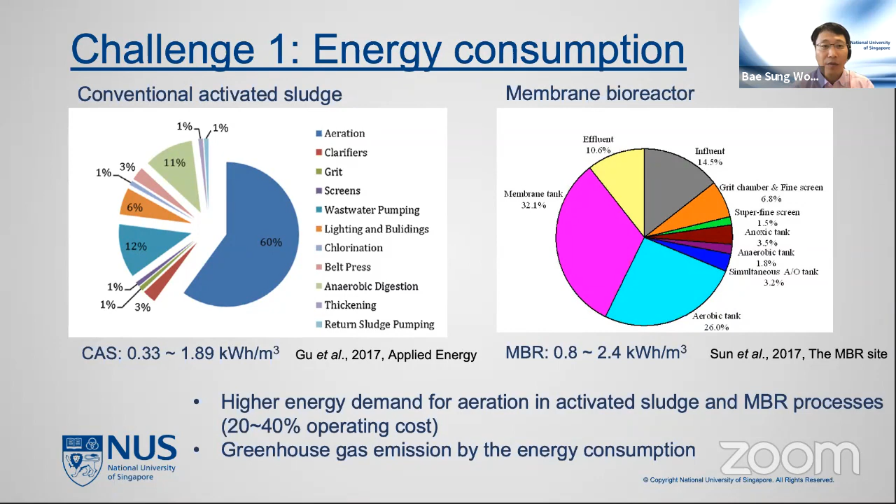Those higher energy demands, particularly aeration in activated sludge and membrane biological processes, cause up to more than 40% of operation cost. Such a high energy demand leads to greenhouse gas emissions due to the operation of this highly intensive process.

Another challenge we are facing in current wastewater treatment plants is emerging contaminants, such as personal care products and antibiotics. Unused or used antibiotics or personal care products pass through the toilet to the wastewater treatment system. Agricultural activities also contribute antibiotics or personal care products. Those untreated or treated, sometimes degraded, products are a huge concern in our society.

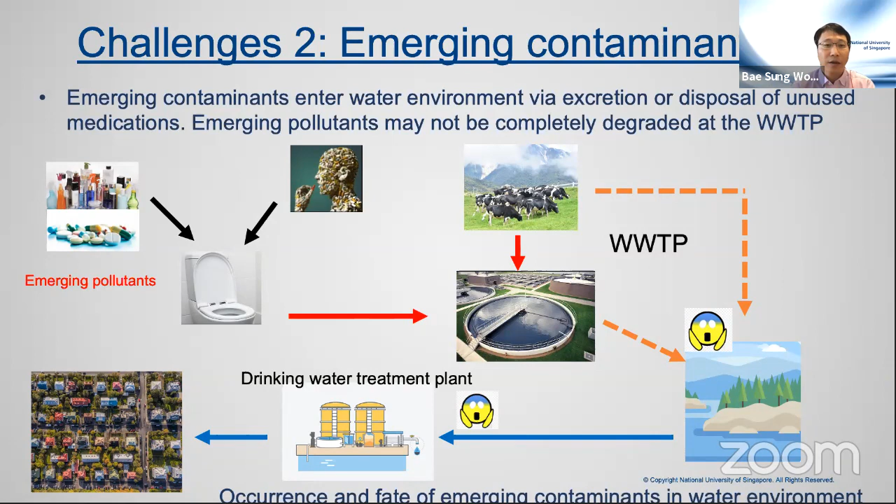For example, antimicrobial resistance genes, or personal care products which cause hormone changes in receiving water. Those receiving waters often feed drinking water treatment plants. Eventually, human beings consume that water. So emerging contaminants enter the environment, either through disposal of unused products or excretion. Some of the emerging pollutants may not completely degrade in a wastewater treatment system. So today I'm going to give two case studies conducted in NUS.

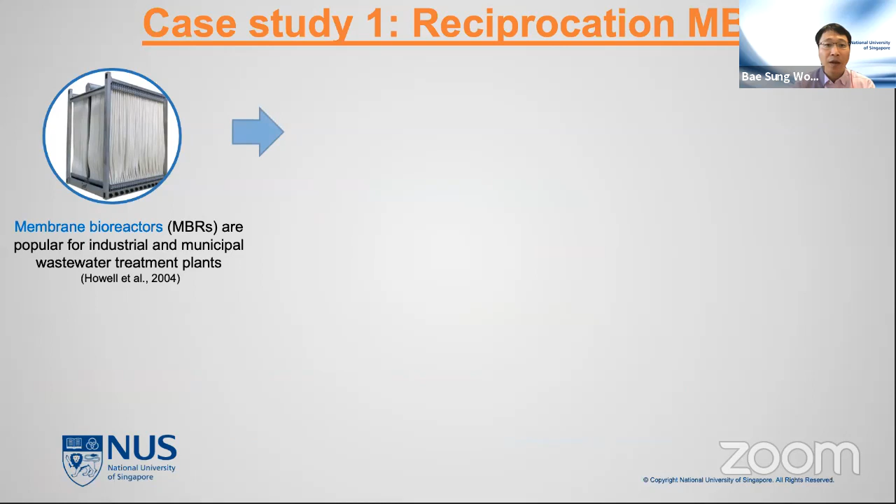The first case study is a reciprocation MBR system. MBR, membrane bioreactor, is one of the popular treatment systems for industrial as well as municipal wastewater, because this system has a small footprint, controls solids, and provides high effluent quality and good retention of pathogenic microorganisms. However, a membrane bioreactor has a bottleneck, which is inevitable biofouling on the surface of the membrane due to inorganic, organic, and in most cases biological pollutants attached to the surface.

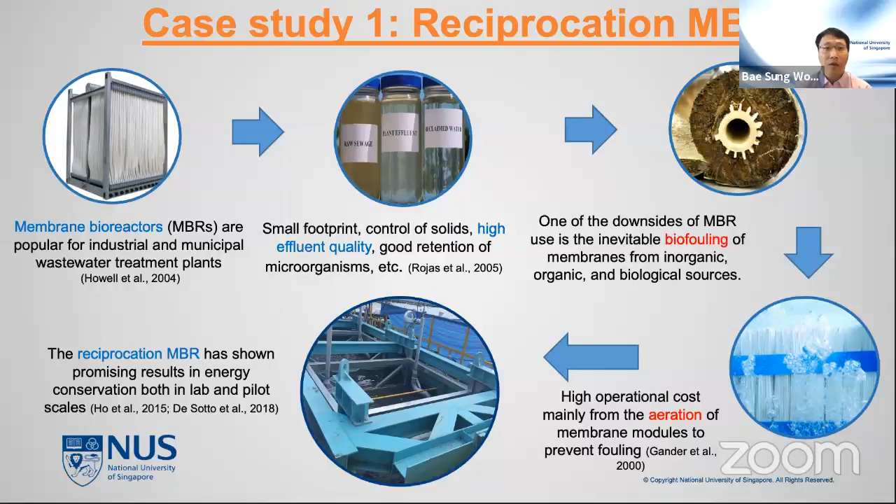From a practical point of view, most membrane bioreactors are operated with air scouring, using aeration to mitigate biofouling in the membrane bioreactor. However, that aeration causes huge operation cost. Recently, our lab has demonstrated a reciprocation membrane bioreactor, which is promising in terms of energy consumption. We demonstrated it both in lab and pilot scale. So what is the reciprocation MBR system? This is a pilot scale membrane bioreactor demonstrated in a domestic wastewater treatment system in Singapore, with a short HRT of 1.5 hours with chemical backwashing.

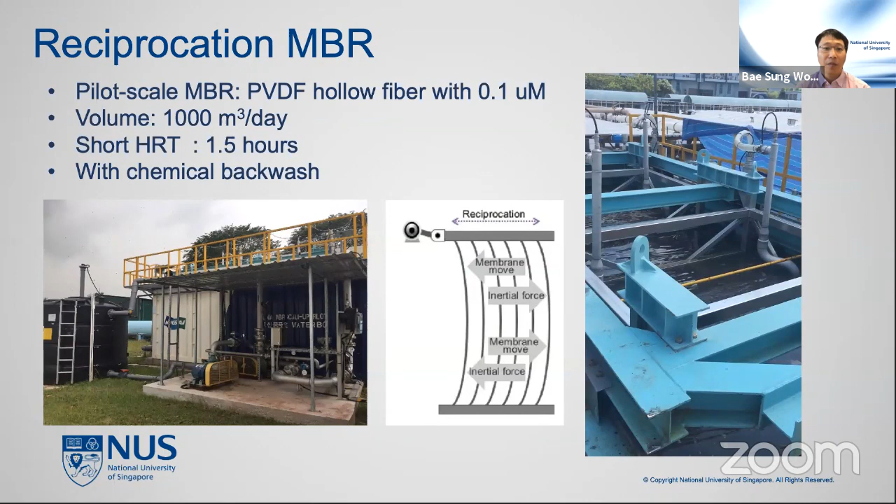So this figure shows the performance of the membrane bioreactor. We operated it for more than 10 months, but I'm going to show you only 6 months, 180 days. So we actually operated it for more than 120 days. We experienced stable performance. Sometimes there was a manageable TMP increase. This is the TMP. And also this system has semi-weekly maintenance cleaning.

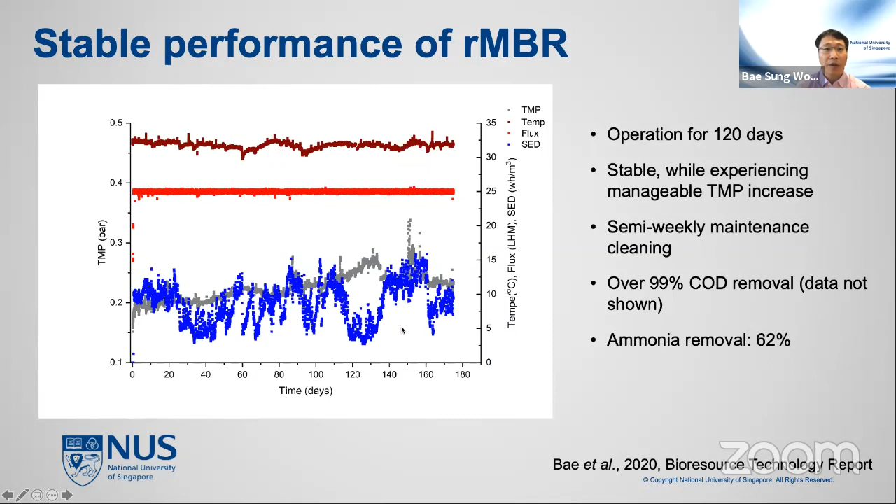So we achieved more than 99% COD removal, and we achieved around 60% ammonia removal. And particularly, I want to highlight the specific energy demand for the membrane bioreactor: the reciprocation MBR requires a very small amount of energy, 0.003 to 0.015 kWh per cubic meter at 25 LMH. So that is 80% reduced energy consumption compared to a conventional air scouring MBR system.

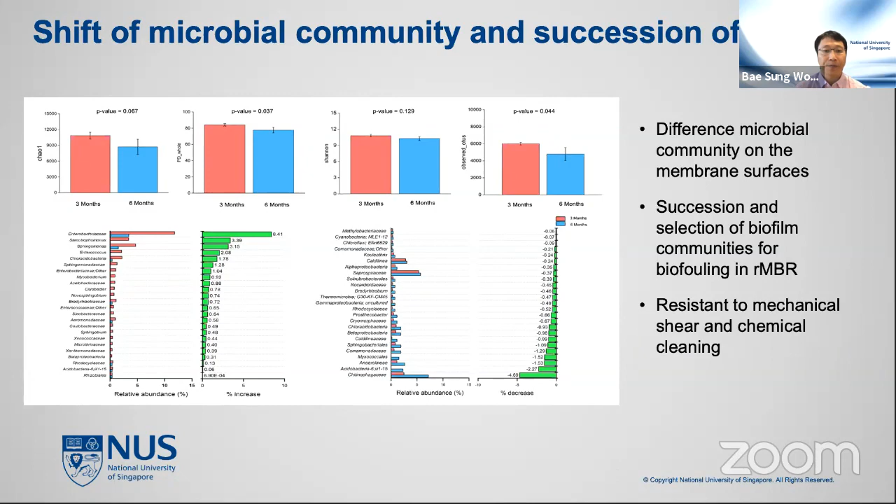So I'm gonna share a toxicology study which we conducted in our lab. So let's start with the background information first. Triclosan was chosen as the research target compound because TCS, triclosan, is an antibacterial agent widely used in home and personal care products. There's extensive use, a huge amount, and also a large amount of TCS was directly discarded into the water system. TCS is non-volatile and moderately soluble, so environmental sources include wastewater effluent, hospitals, and sludge samples. Even at recreation sites TCS was found.

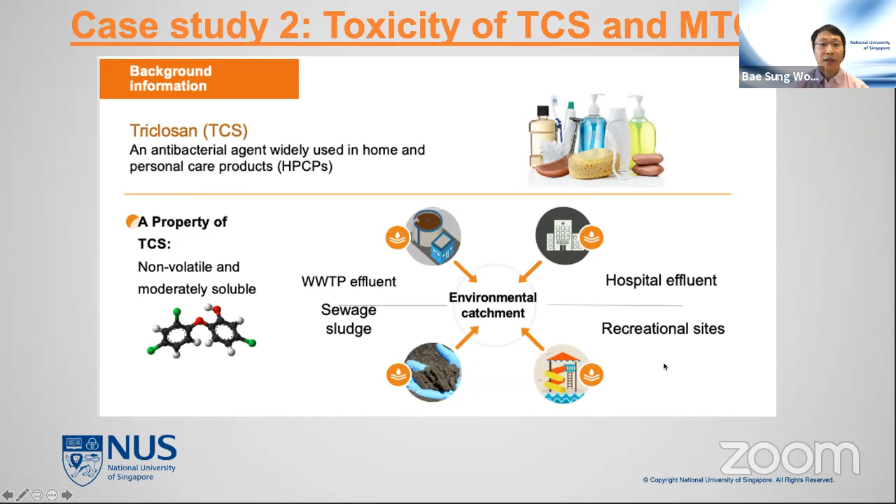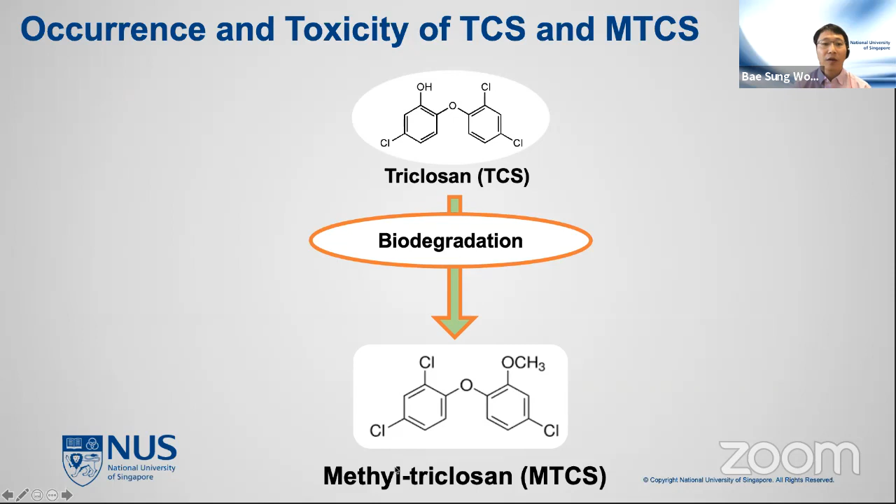In terms of occurrence and toxicity of TCS and methyl triclosan, this is the chemical structure of triclosan. Generally, triclosan is degraded through a biological wastewater treatment system, and the byproduct is methyl triclosan. In terms of toxicity, TCS is known to induce embryonic lesions and delay of development, cardiac toxicity, and endocrine disruption. And also MTCS, methyl triclosan, interacts with proteins and disrupts thyroid hormone actions. Phenotype effects have also been reported in zebrafish embryos.

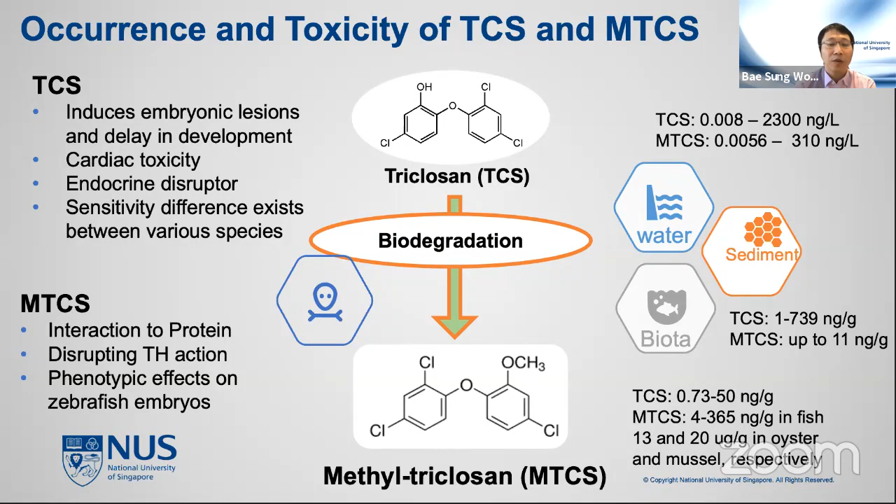The occurrence of TCS in the water matrix is up to 2000 nanograms per liter, and MTCS is up to 300 nanograms per liter. Sediments and even biota have higher concentrations of triclosan and methyl triclosan. So we are using TCS and MTCS as model chemicals to understand how these emerging contaminants affect aquatic environments.

So in terms of methodology, we use omics approaches. We use transcriptomic analysis of the gene expression of zebrafish embryos, and we also use metabolomics, so metabolites such as sugars, nucleotides, amino acids, and lipids. So using transcriptomic and metabolomic analysis, we understand how the chemical affects the development of the zebrafish embryo.

The advantage of the multi-omics approach is that it allows us to better understand changes in genomic and metabolic pathways, and we can predict the biological response to external stressors, here TCS and MTCS, and that increases the robustness of the toxicity study. And also the zebrafish is a good model organism to predict human health effects as well.

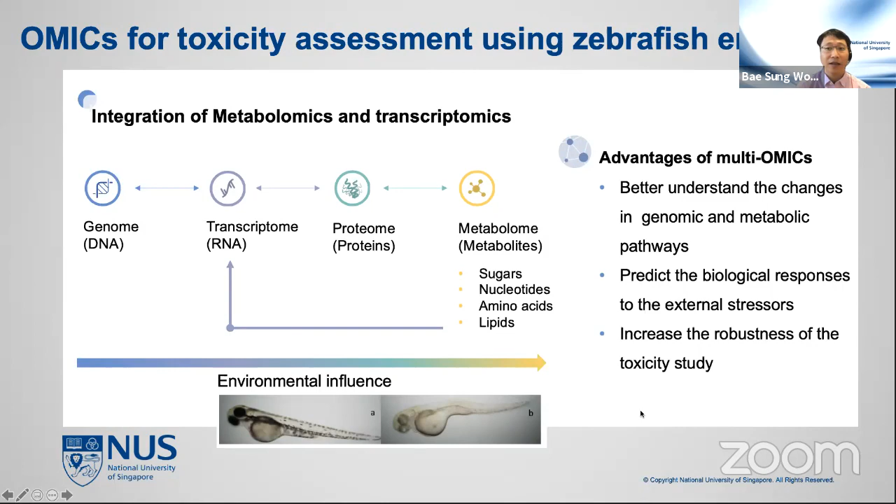So let's move to the results section first. So MTCS, methyl triclosan, affects biological pathways of amino acid synthesis and starch and sucrose metabolism. This PCA plot shows different concentrations compared to control here. And the higher concentration, 400 micrograms of MTCS, here is distinct from the other groups. We also observed morphological changes in the pigmentation rate of zebrafish embryos at 400 micrograms per liter of MTCS. And we also have a similar separation with MTCS exposure.

Then the heat map shows 21 different metabolite changes, from control to lower to higher MTCS exposure. Particularly, the higher concentration shows 21 dysregulated metabolites.

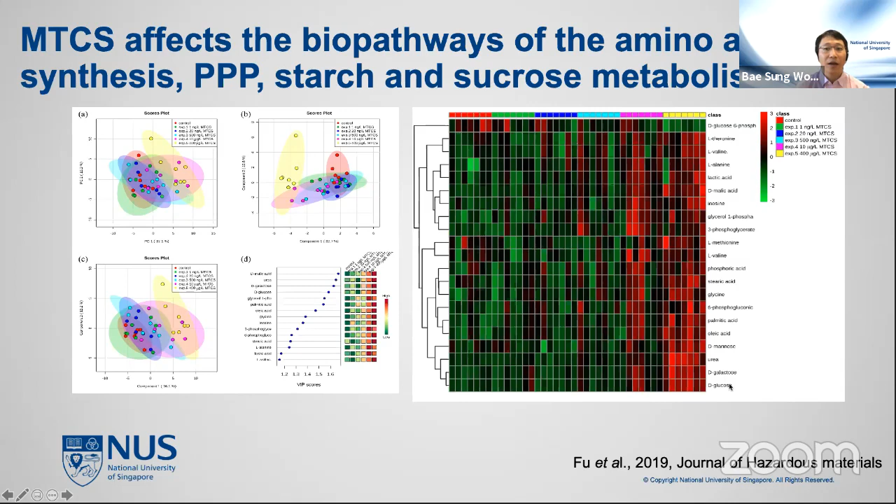So we also wanted to understand the toxic effect of a TCS/MTCS mixture on zebrafish embryos, because through biological wastewater treatment systems the environmental ratio of triclosan versus methyl-triclosan is a 10:1 ratio. So for example, we often found 10 micrograms of TCS, which indicates 1 microgram of MTCS. So we want to know the real environmental effect of the wastewater discharge into the aquatic environment.

So we chose different mixtures 1, 2 and 3, meeting the environmental ratio of 10 TCS versus 1 MTCS. The PCA plot on your left shows a differentiated mixture 3, which is the higher concentration of TCS and MTCS. As well as this, the heat map shows 4 metabolites, particularly mannose, galactose, glucose, and lysine, are disrupted with exposure to the mixture of TCS and MTCS.

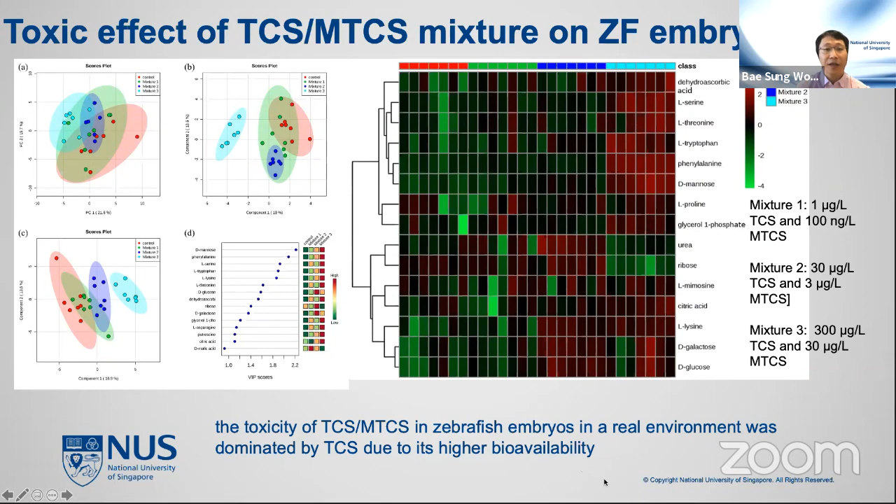So the toxicity of TCS/MTCS to zebrafish embryos in a real environment was dominated by TCS, mainly because of the higher bioavailability of the TCS chemical. And we want to understand the differences between TCS, MTCS, and the mixture of TCS/MTCS in zebrafish embryos. So using multivariate analysis, heat map analysis, as well as pathway analysis, we found energy metabolism, amino acid metabolism, and cell function were significantly influenced by TCS and MTCS. And also biological pathways, particularly the TCA cycle and nitrogen metabolism, are affected. So those listed dysregulated metabolites show how TCS and MTCS, if not treated properly, are going to affect aquaculture animals.

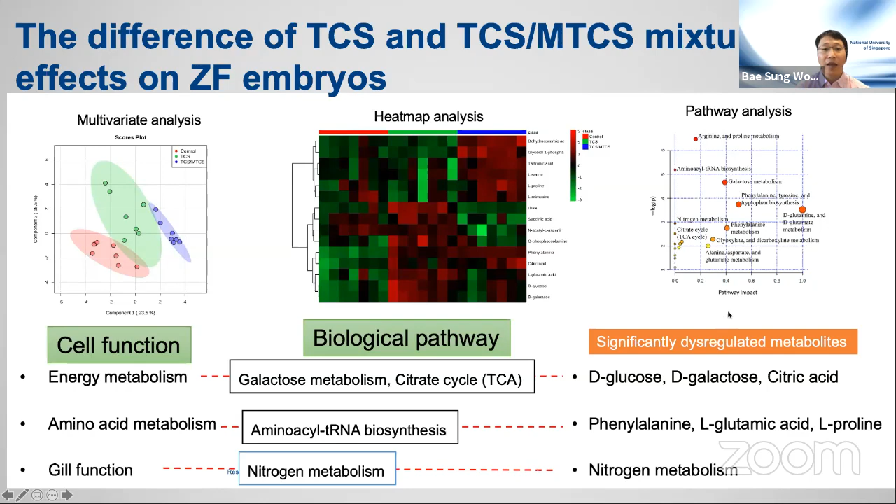Not only metabolites, a gene expression study shows the potential toxicity of TCS. We used transcriptomic analysis and KEGG analysis of gene expression. Particularly, I want to highlight the action of TCS on oxidative phosphorylation. So this is the inner mitochondrial membrane, where TCS acts as a proton ionophore. For example, this is TCS, which interacts with hydrogen, which prevents ATP synthesis. Another effect is on cardiac muscle contraction, a similar effect, where TCS prevents the calcium pathway in cell metabolism. So this, based on transcriptomic analysis, shows how TCS interferes at the molecular level.

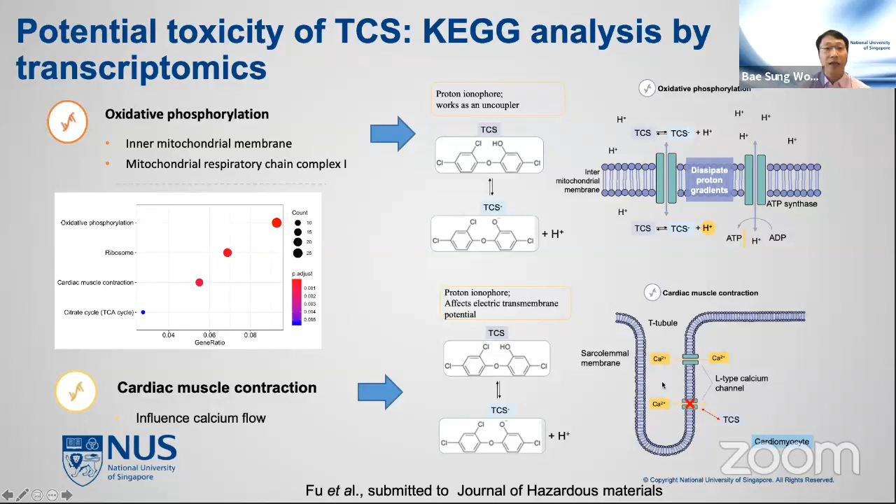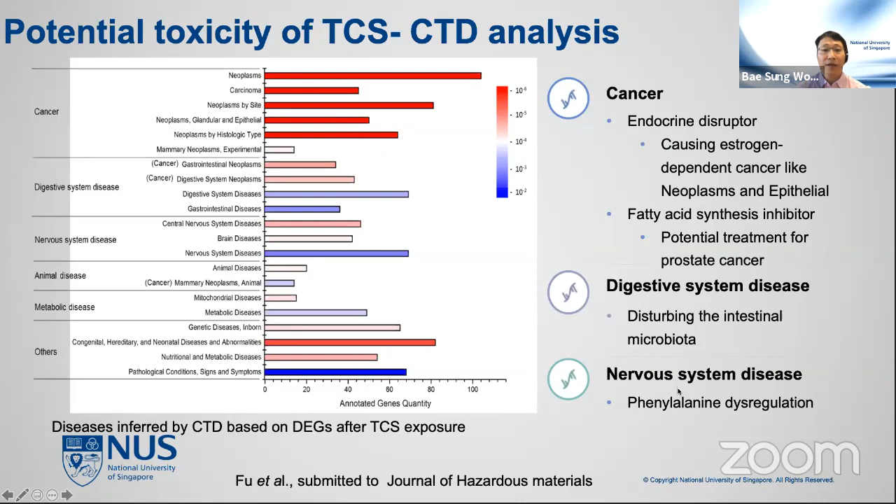And furthermore, we're using the Comparative Toxicogenomics Database to see how an environmental chemical, for example TCS, affects human health. Using differential gene expression shows the potential health effects if TCS is exposed to humans, and what diseases may be caused by TCS exposure. One example is cancer, as an endocrine disruptor or fatty acid synthesis inhibitor; those modes of action cause cancer. And also TCS might cause digestive system diseases, because TCS will disrupt intestinal microbiomes in humans. And also there is dysregulated phenylalanine, which affects the nervous system in human beings.

So let's move on to the conclusions of the 2 case studies. The first case study used the reciprocation MBR system to reduce energy cost in a real wastewater treatment system. The reciprocation MBR generates a mechanical force to control biofouling. The specific energy demand of this reciprocation MBR ranged from 0.003 to 0.0515 kilowatt-hours per cubic meter, which reduced energy consumption by up to 85% compared to air scouring MBR. We noted MLSS concentration is one of the key parameters controlling energy consumption, because MLSS concentration correlates with specific energy demand.

In the second case study, metabolite levels were altered with MTCS exposure, even when phenotypic changes were not observed. Toxicology studies employed higher concentrations of TCS and MTCS. Basically, at lower, environmentally relevant concentrations, we could not find any phenotype change. However, metabolites revealed certain changes due to TCS and MTCS. And particularly, TCS dominated the effects at the environmental ratio of the TCS/MTCS mixtures. And using integrated approaches of metabolomics and transcriptomics revealed the toxic effects and eventually potential diseases associated with TCS and MTCS.

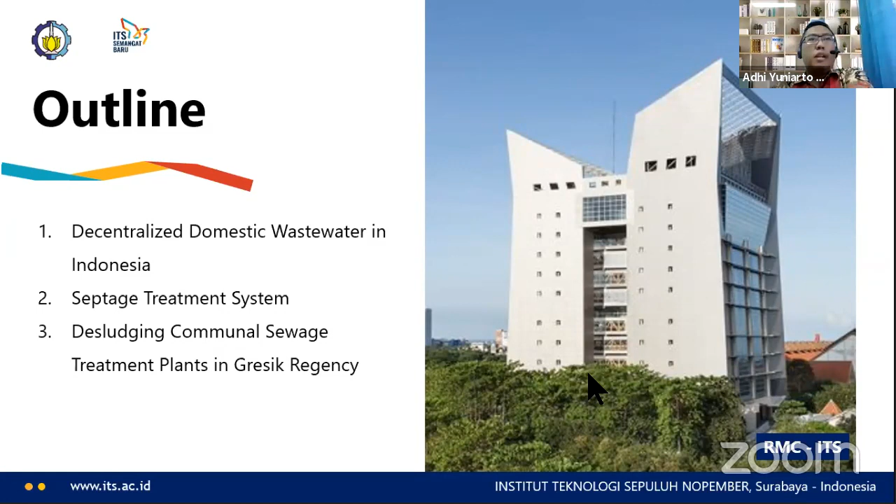I want to give some overview about Indonesia so you can feel how difficult the challenge is for sanitation and wastewater systems in Indonesia. The population of Indonesia is about 273 million right now, and 56% live in urban areas, expecting 67% to live in urban areas in 2030. We have 8 major islands, but 58% of the population live in Java. It's quite small.

Here, we have decentralized government with 34 provinces, 415 regencies, and 93 cities. These local governments can set up local regulations, but for sanitation and domestic wastewater infrastructure funding, they still depend on national programs and national agencies.

Let's see the existing sanitation situation in Indonesia right now. Wastewater, especially grey water from homes or public facilities, is still disposed directly into water bodies, especially the drainage system. The latest report says that more than 75% of houses already have individual toilets, but most of them are low quality latrines. Open defecation still happens. In some parts of Indonesia, showering and washing in streams still exist.

In rural and urban areas, illegal disposal and dumping of sludge or septage from desludging of septic tanks happens into rivers or empty spaces, especially in rural areas. The impact of poor sanitation: we already know that 70% or more of rivers and groundwater are polluted. The sad one, 50 per 1,000 babies mortality due to diarrhea, which is 4% of diarrhea happening to the population.

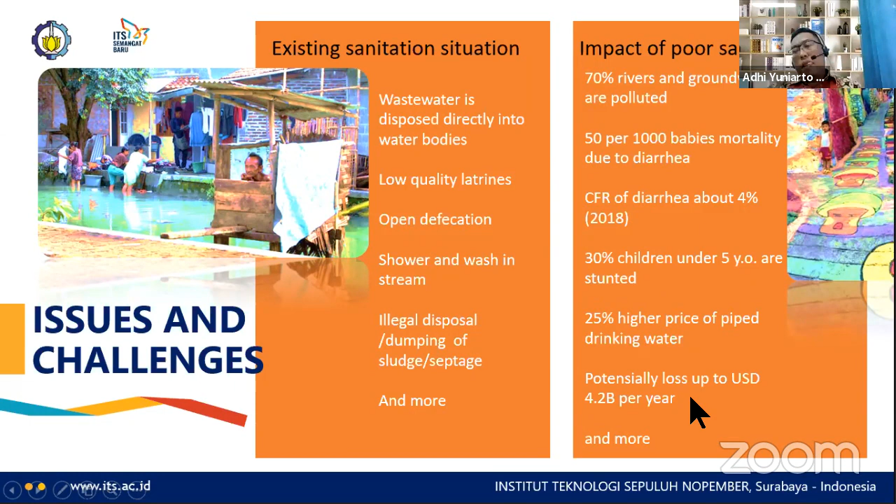30% of children under 5 years old are stunted, and we have to pay a 25% higher price for piped drinking water. The losses from this poor sanitation situation are potentially about $4.2 billion per year. To overcome this situation, in 2007 the national government already set up programs for sanitation, and we try to have 100% sanitation access in 2030.

The programs are mainly done by ministries. The first program is community-based total sanitation, which belongs to the Ministry of Health. The second one, infrastructure development, belongs to the Ministry of Public Works and Housing. And the acceleration of sanitation development program is from the Ministry of National Planning. We also have a program from the Ministry of Village and Transmigration, we call it Village Funds, and special funds and grants for sanitation from the Ministry of Finance.

This also includes sanitation funds from donor parties, for example USAID, JICA, Danida, and other foreign parties. And the last one is school sanitation from the Ministry of Education, because we also have to improve our school conditions.

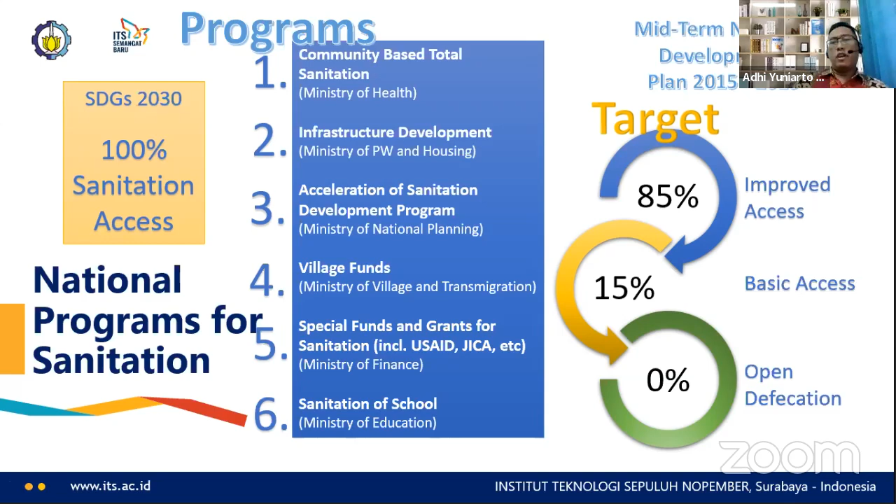And from the data, we know that the urban access is not much improved. But in rural areas, we have a good improvement during these 2 years. And we also have the national program for community-based total sanitation, which we call STBM, starting in 2008, and it consists of 5 programs: ODF, open defecation free; washing hands with soap; safeguarding drinking water and household food; domestic waste management, including solid waste; and domestic wastewater management.

And the program, especially for ODF, for sanitation, the last reports show good progress. We still have about 7.6% of people who still practice open defecation.

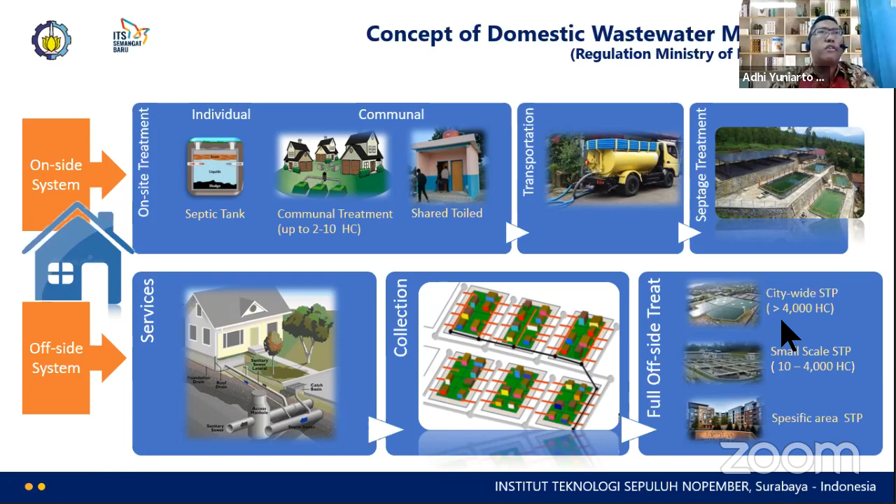The full-scale or city-wide STP, more than 4,000 house connections, or 20,000 PE. A small-scale STP, around 10 to 4,000 house connections, and a specific area STP. Right now in 2019, we have on-site treatment, about 260 septage treatment plants, because the end of the treatment is the septage treatment plant. I don't know exactly; some data say 262, 264, but around 260 are already built and rehabbed or optimized until now.

For offsite treatment at regional or city scale, we have some cities already connected. Not the whole area of the city, maybe most parts of the city: Medan, Parapat, Batam, Tangerang, Jakarta, Denpasar. And we will have 5 more big sewerage systems and STPs in Jakarta, Palembang, Pekanbaru, Jambi, and Makassar. Jakarta will be about 2 million PE.

So offsite treatment using decentralization and the communal system: we have more than 50,000 community-based communal systems, and institutional-based around 240, built in 128 cities or districts. But the capacity is not so big, around 1.7 million PE. So based on data in 2017, only less than 2% of the population have an offsite system.

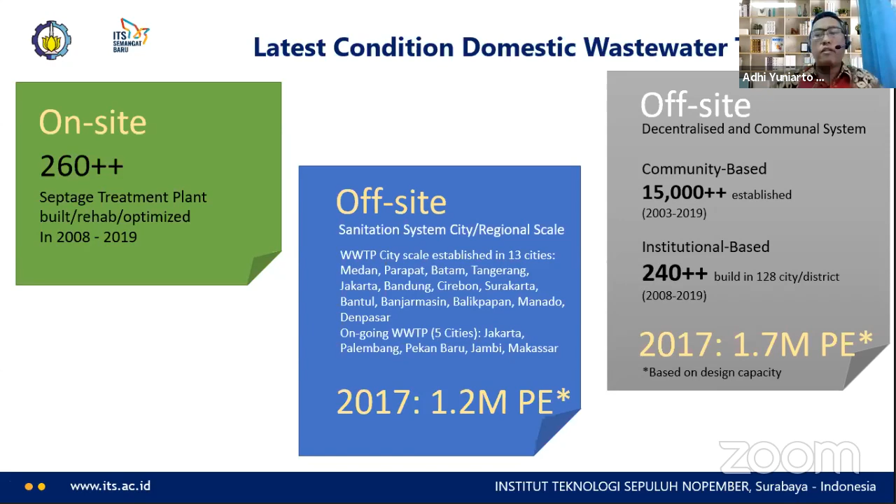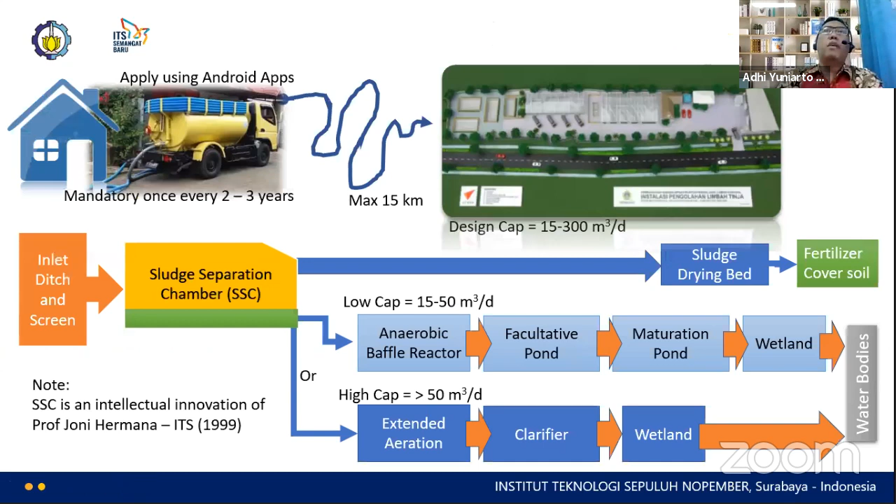Let's move to the next part, the septage treatment system. According to the regulation, it is mandatory for individual septic tanks or institutional or communal systems to be desludged. Some local governments, through the public works agency, have already developed the system. So the customer has to apply using an Android application to set up the time and put in a schedule.

This is the system recommended by the regulation. The desludging system starts from the inlet ditch and goes to the sludge separation chamber. This is one of the intellectual innovations of Prof. Joni Hermana, and it works like a filter, so the solids stay on the surface and dry naturally, then transfer to the sludge drying bed and become fertilizer and cover soil.

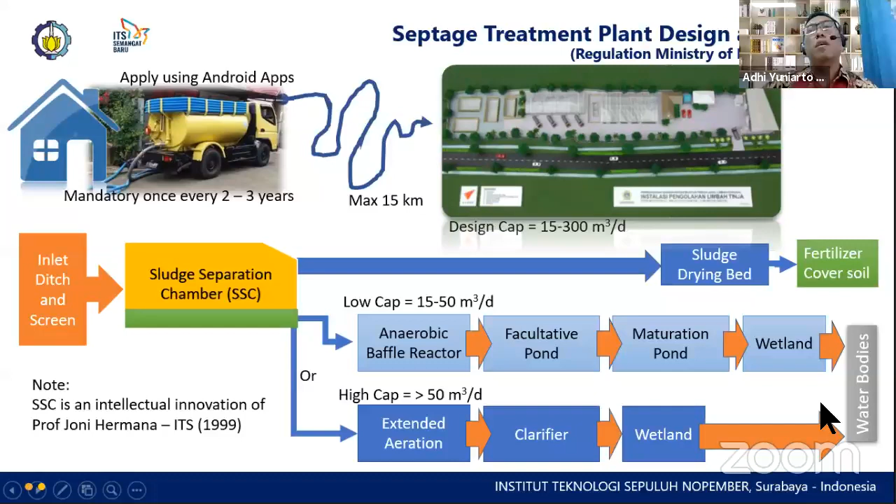And the underdrain: for low-capacity treatment plants, they usually use an anaerobic bioreactor or anaerobic baffled reactor, then go to the facultative and maturation ponds and a wetland before going to water bodies. The high-capacity ones use extended aeration, sometimes an oxidation ditch, sometimes an extended aeration tank. They go to a clarifier and wetland before the water bodies.

But the disadvantage is we have to change the filter, usually gravel and sand, to maintain the efficiency of the filtration and prevent clogging, and transfer the sludge from SSC to sludge drying bed manually or using a crane, and it requires a large area, especially for bigger septage treatment plants. They have to build more chambers for SSC and the natural drying process. So usually they need about 5 to 12 days.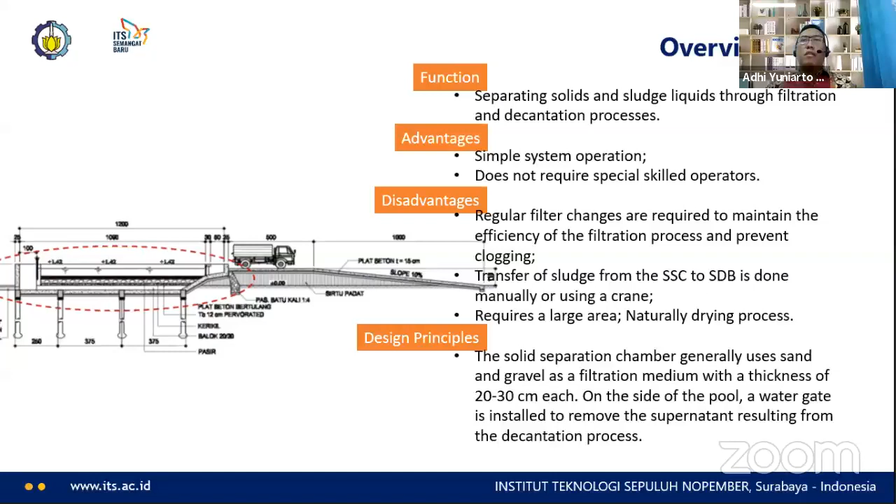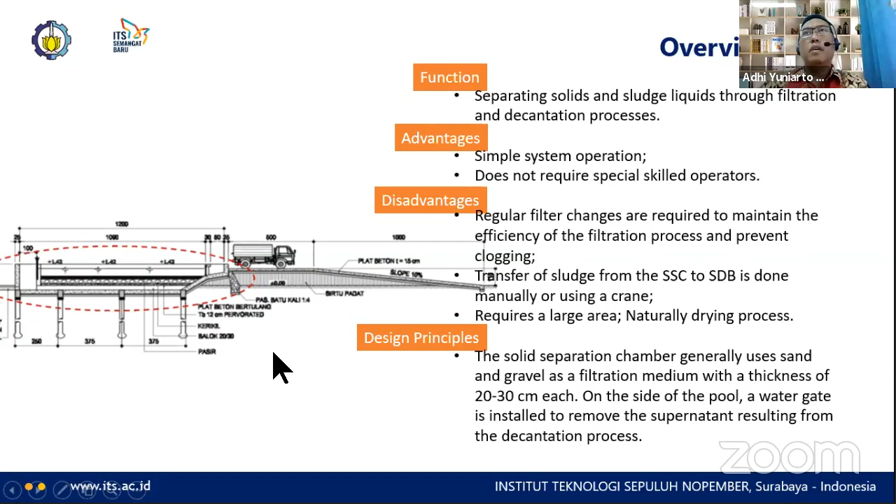And so the design principle is the solid separation chamber generally uses sand and gravel, the thickness about 20 to 30 centimeters, and there is a gate to remove the supernatant, and we have to remove also the dried sludge. So you can see this video later. You can find it in YouTube.

This happened in Gresik. The trucks will come to the sewage treatment plant. They empty the tanks. After the coarse screen, the liquid comes to SSC. After 5 to 12 days, they will take the dry sludge to the treatment for fertilizer, and the underdrain water comes to the ponds and goes to the river.

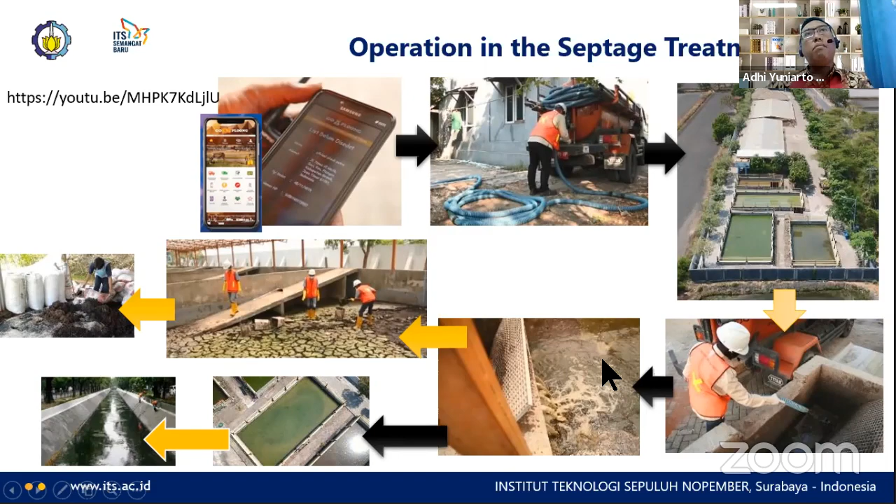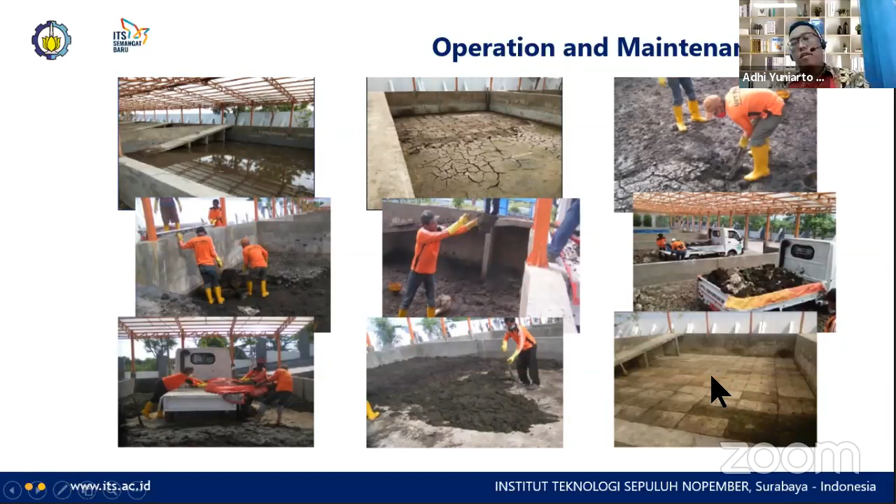Here's some operation and maintenance that happens also in Gresik. After emptying the tanks, the liquid comes into SSC and the drying process, they have to manually remove it from the SSC to SDB. Yes, and they have to dry or clean the SSC before new sludge comes.

Okay, this is some practice of septage treatment management in Gresik. Regency of Gresik, located in the north part of Java Island in the east part, has 1.3 million in population, and the area is hilly, limestone clay soil. The average altitude is about 25 meters from sea level, and this is an industrial and fishery area actually, and housing with mostly individual septic tanks.

They have 134 on-site communal STPs with one septage treatment plant, which is Pitoyokuchi. This is the location of STP Pitoyokuchi, north of the populated area, about 20 to 25 kilometers away. The 134 communal STPs are located in 10 districts, and 9 coming in 2020. And they mostly use the anaerobic baffled reactor system with 6 to 10 compartments, mostly built in kampungs in the city center or surrounding districts, you know, the very dense area.

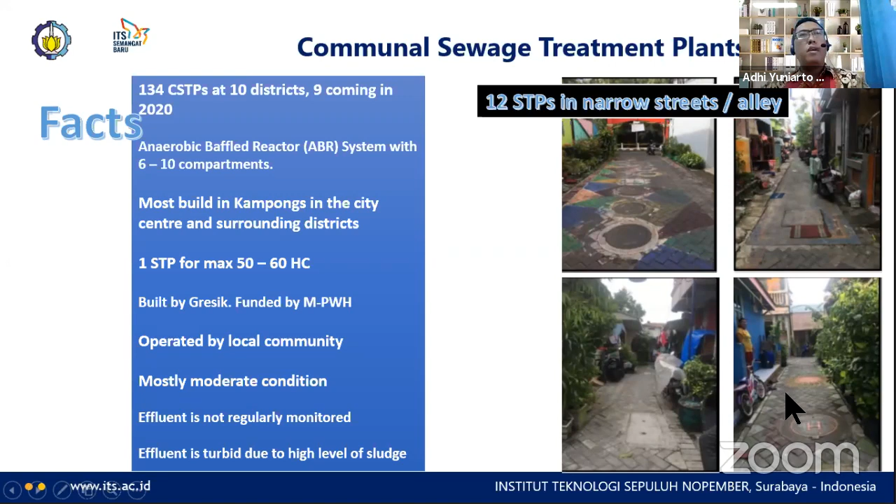And we found that 12 STPs are located in narrow streets or alleys. You see the situation is quite good here because it's a 4 meter wide street, but the next one is quite narrow. This one is only 1.5 meters wide. So this process happened in Gresik.

Okay, we cluster the location of STPs. We can use trucks if the road is more than 4 meters. Usually with the trucks' capacity, they can handle 3 times per trip, sent to the septic treatment plant. Cluster 2 is only for 2 to 4 meter wide alleys or streets. We use 3-wheel motorcycles already modified for septic tanks, and the capacity is about 1.5 to 1.8 cubic meters per motorcycle, and transfer to the trucks, which are standby at the nearest location.

But for cluster 3, which I think is three communal sewage treatment plants, we use the Kedoteng. Kedoteng stands for kereta dorong septic tank, or septic tank push car, operated by men. They can push it or connect it with a motorcycle, but near the location, they have to push it, and come back. The push cart capacity is about 1.1 or 1.2 cubic meters. Sometimes if full of sludge, they cannot use all the capacity because it's too heavy. And then they go to the trucks. Sometimes in one day, in one location, they have to go back 2 or 3 times to do the desludging.

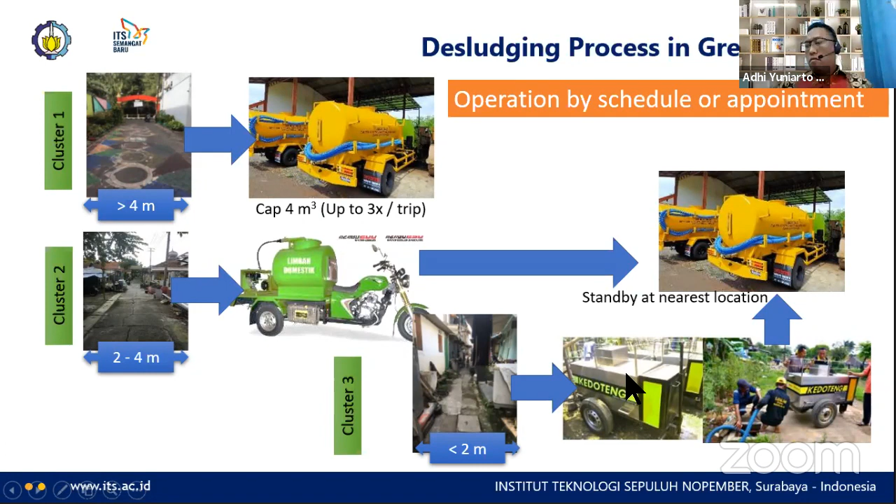To summarize what I have said so far, the progress of the sanitation program in Indonesia is very good. I'm not saying it is excellent, but it is almost ideal for us, and still the top priority. And the funding is not affected by the crisis right now, the financial crisis or pandemic, and involving the community to care about environment and sanitation still happens. Local government makes programs that involve the community, like right now clean city, healthy kampung, and so on.

And the last one is empowering local government and community to maintain and operate the existing facilities, because local governments, most of them have a financial budget, but most of the budget is in salary. So sometimes they don't put maintenance and operation as the top priority.